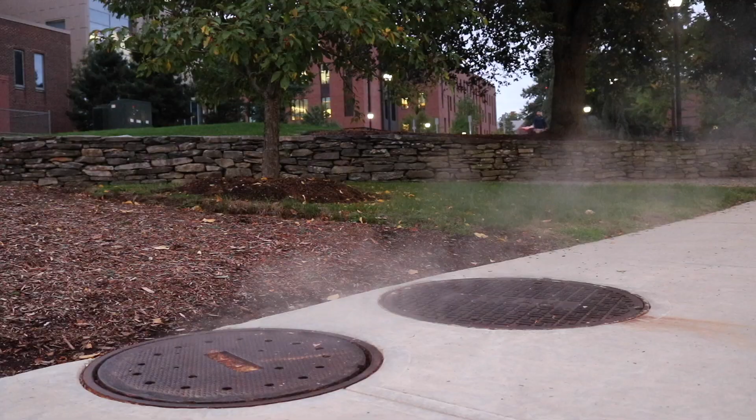But on the topic of water, not many students think about where the water flowing out of their taps, fountains, and toilets around campus comes from. Or, more importantly, where does the used wastewater go? This is where the water pollution control facilities around campus come in. Join us on our journey as we seek to reverse engineer this complicated large-scale process, from tap to bottom.

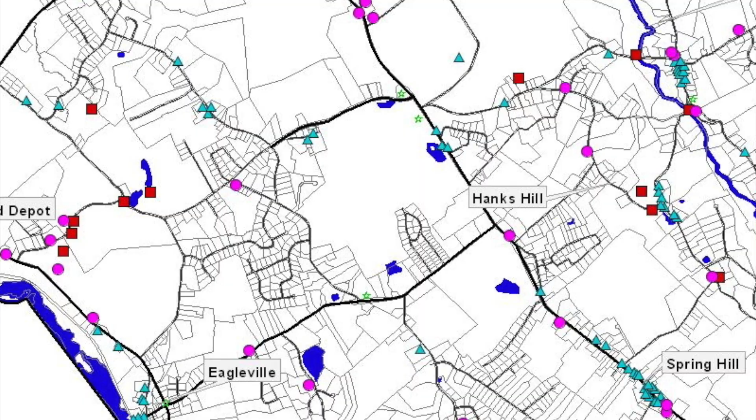The water pollution control facility for UConn is located at 25 LeDoyt Road within the main UConn campus. Rebuilt in 1998, it sits on 10 acres of land. The reclaimed water facility is located right beside it, a position that allows treated wastewater to flow into the facility to be further processed for use in the cogen power plant. These two facilities service both the main and depot campuses of UConn, as well as UConn's neighbors in the surrounding town of Mansfield. The wastewater facility processes an average 1.5 million gallons of wastewater daily.

The WPCF operates under a National Pollutant Discharge Elimination System permit, issued by the Connecticut Department of Environmental Protection. Part of the water treated at the facility is released into the Willimantic River next to the Eagleville Dam. The rest goes to the reclaimed water facility.

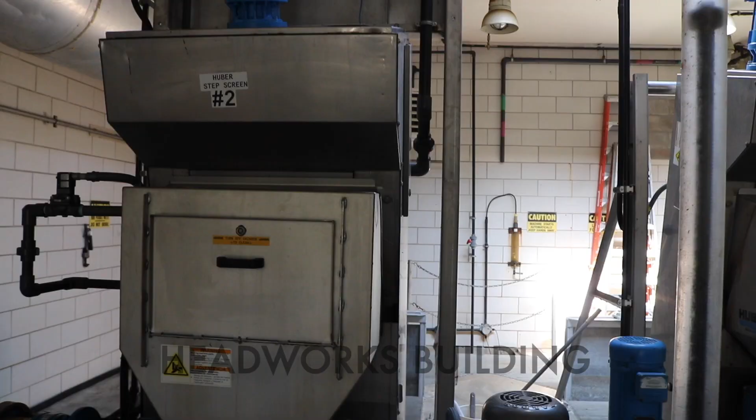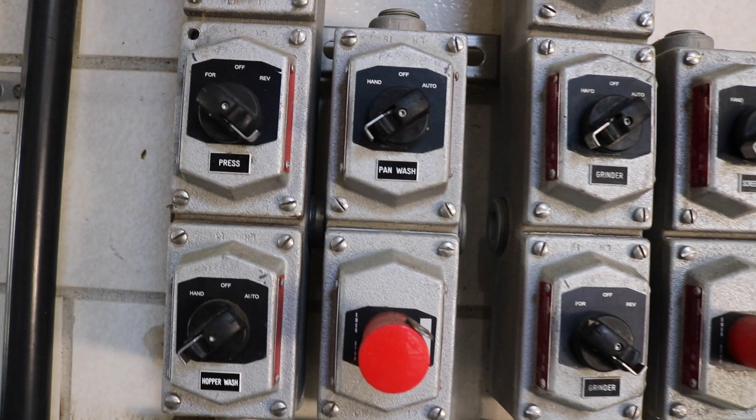The first stop for the collected wastewater is the headworks, located in this building here. The wastewater first runs through a step screen. This traps any inorganic waste that was carried along with the water, such as hair and sanitary napkins. The step screen brings the waste out of the water, where it is ground up in a grinder located just behind the step screen. Afterwards, the ground up material is washed to get rid of any organic matter that was trapped with it.

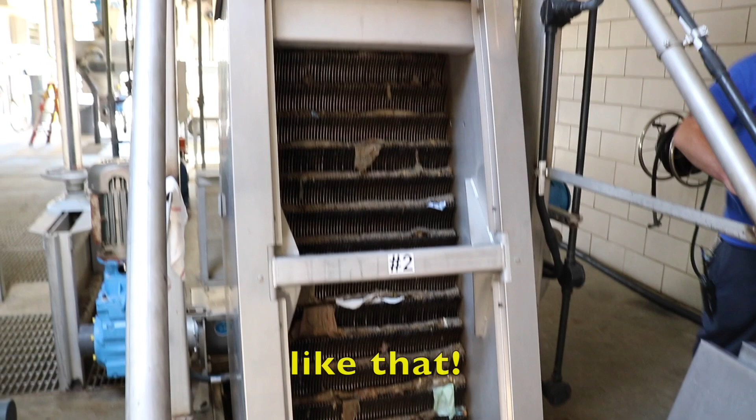It's like all the crap that comes out. What it does is, when it senses the water level getting high on the side, it'll start to run. Like that.

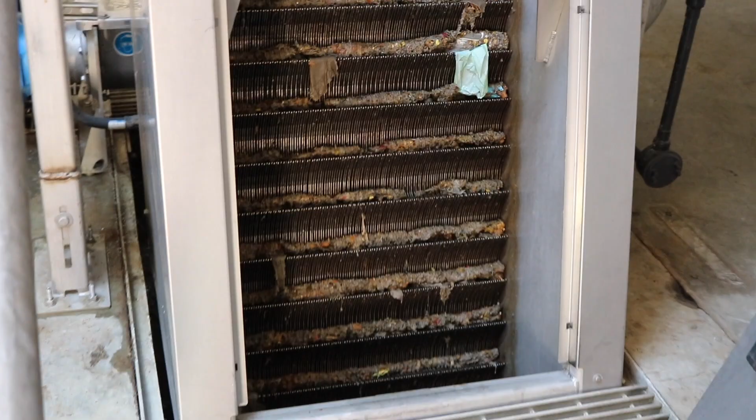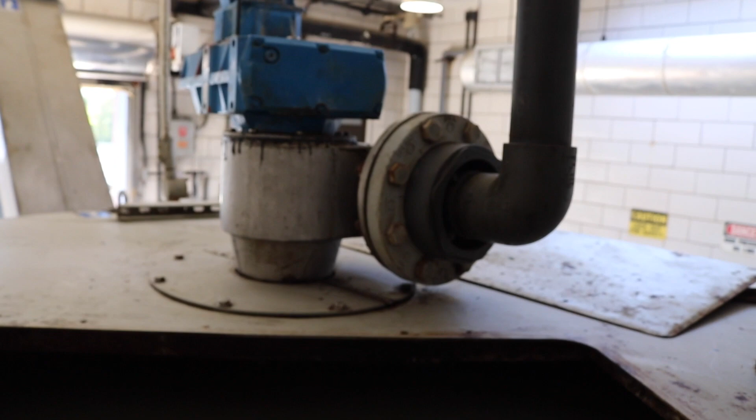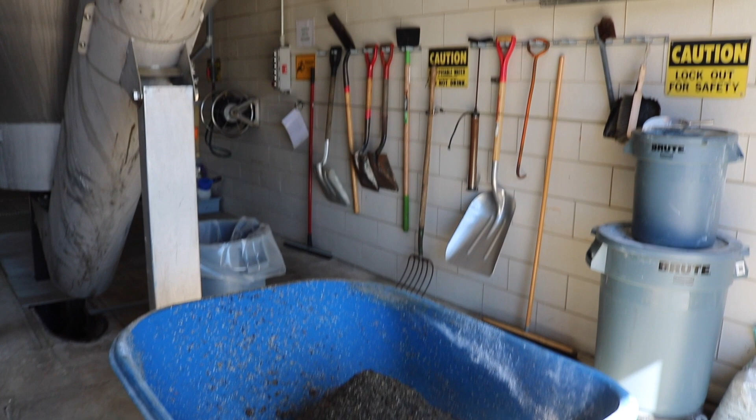After passing through the step screen, the water is slowed to a flow of 1 foot per second. This low rate of flow encourages any additional finer bits of inorganic material, such as gravel or sand, to settle to the bottom. The bottom of this tank is sloped, funneling the material down into a tube where it is pumped upwards to the grit classifier. The grit classifier compresses the material. After enough waste has been accumulated, it falls into a wheelbarrow. The end point of this waste is landfill after it has been tested to ensure that no heavy metals and toxic chemicals are present in the mix.

This step is meant to filter out any abrasive material that may damage the pipes and tank walls ferrying and processing the wastewater. While it does an effective job, there is also a large quantity of organic waste that is collected along with the inorganic waste. Scott, the lab technician of the facility, once ran a test to determine how much of the solid waste was organic. The test involved heating a sample of the waste to 500 degrees Fahrenheit, vaporizing the organic material. When weighed, only 15% of the matter remained, meaning that 85% of the waste disposed of at this stage was organic material.

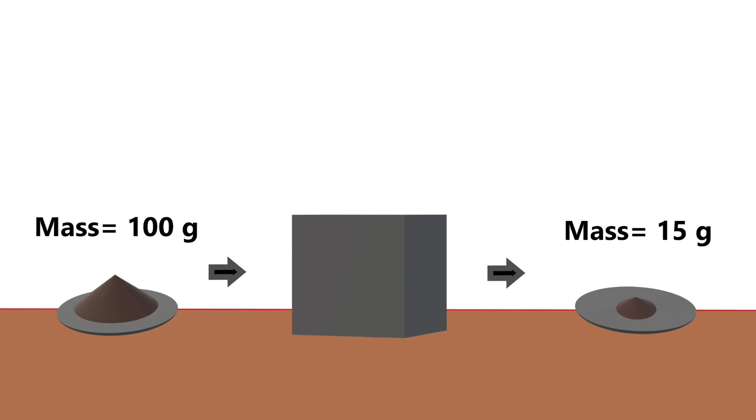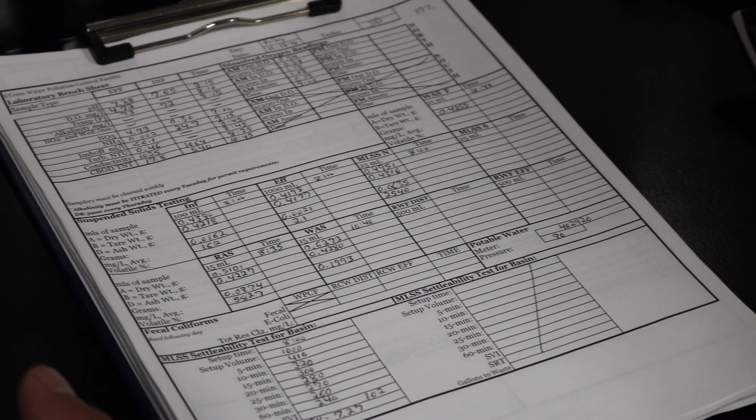So I'm just gonna take my grams, subtract grams of the tare weight. So we have 0.1993. Divide that by 15 mils of sample. Multiply by a million. So our loss is 13,287 milligrams per liter.

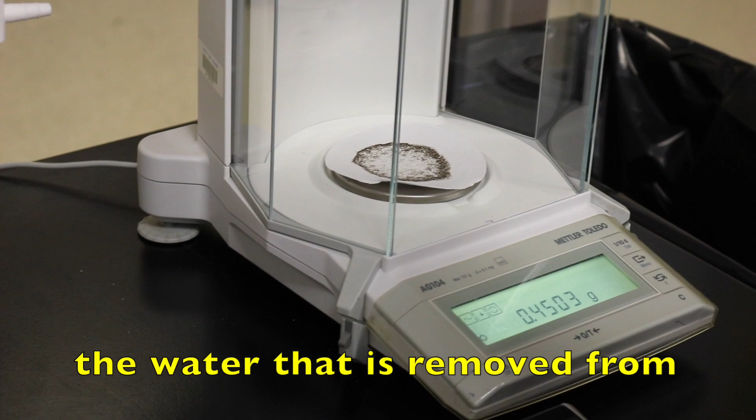I'm supposed to pull this up earlier. And what's that one? This is a filtrate. Okay. This is from the dewatering machine upstairs, the Huber. The water that is removed from the sludge is called filtrate, and we test to see how much loss there is, so we can calculate how much we need to waste. Because if we say we need to waste 24,000 gallons, and we're having 2,000 milligrams per liter of filtrate loss, you can calculate how much more you need to waste to compensate for that loss. Because you're not actually removing as much biomass from the system as you think you were.

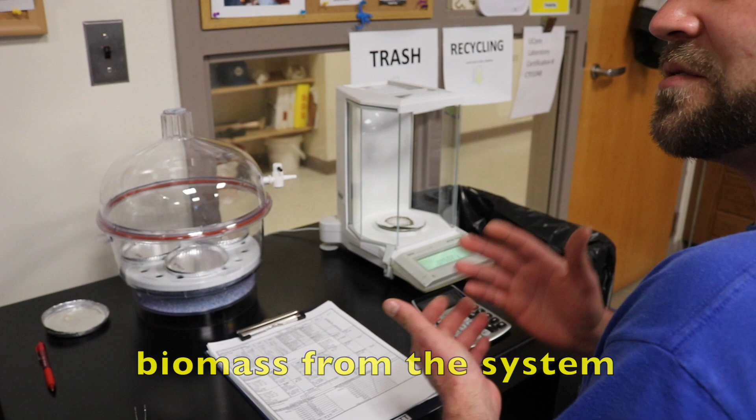Yeah, and how much of a sample was that from? Was that from like 25 milliliters? That's 10 milliliters. 10 milliliters. We've been having poor numbers recently. Poor? Poor. Oh.

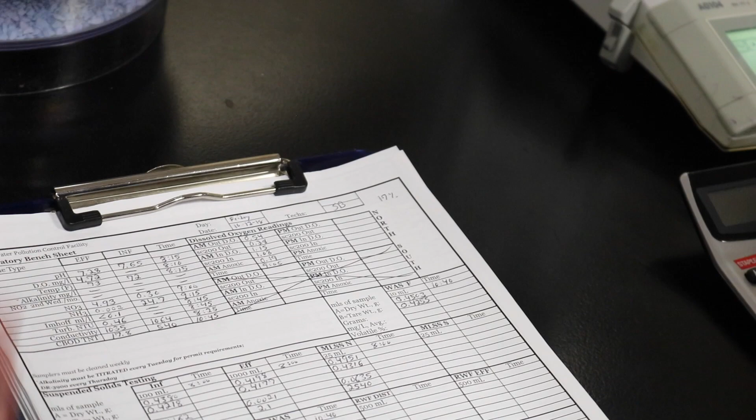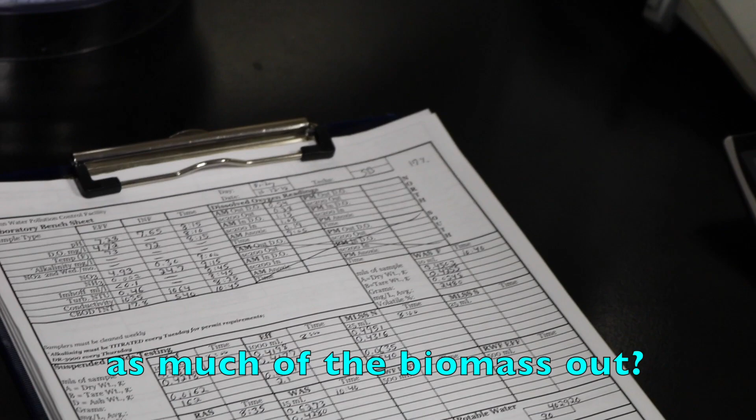Five. 0, 2, 4, 8. 10 mils. That means it's 2,480 milligrams per liter loss, which is kind of a lot. So it's not pulling as much of the biomass out? Yeah, it's escaping. It's escaping back.

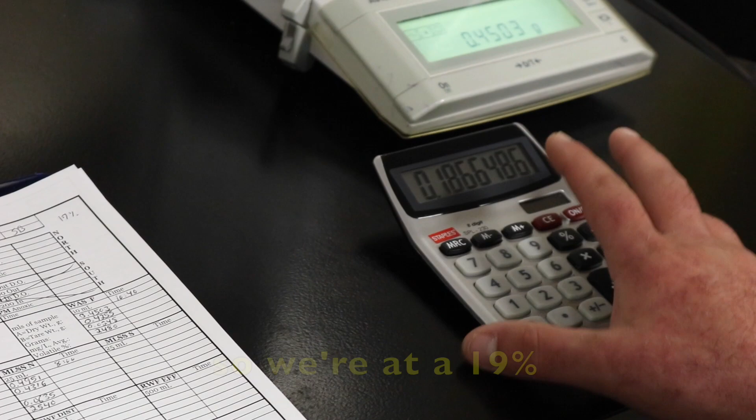An interesting thing to note here is that wastewater treatment plants normally have a primary clarifier after passing through the headworks. The primary clarifier serves to remove some of the organic waste from the wastewater to process it more efficiently. However, the wastewater that arrives at this particular facility has a lower proportion of solid organic waste per gallon than what most facilities receive, and thus doesn't need this step.

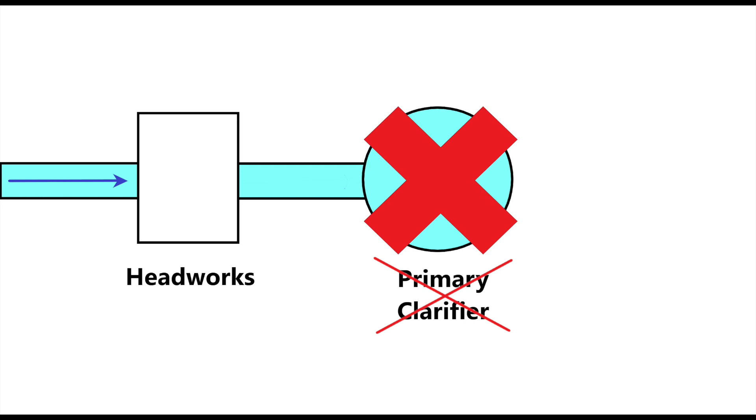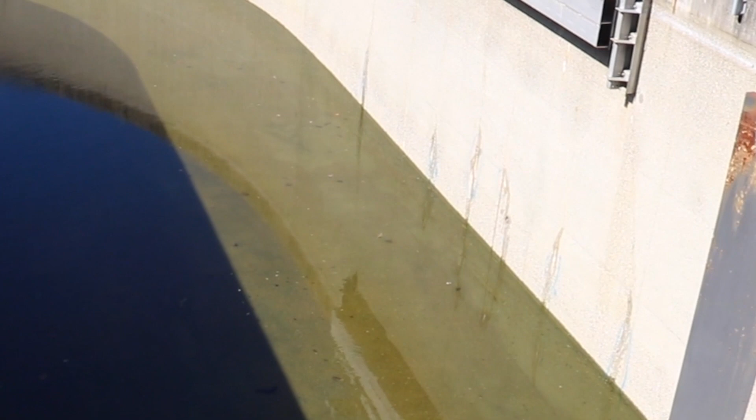While it just looks like a very polluted river on the surface, inside there are microbes hard at work. The microorganisms consist of mostly bacteria, specifically ammonia and nitrite oxidizing bacteria, glycogen accumulating organisms, and ordinary heterotrophic bacteria. Each bacteria carries out an important function, from removing nitrogen dissolved in the water to helping break down the organic waste. The nitrogen primarily comes in the form of ammonia.

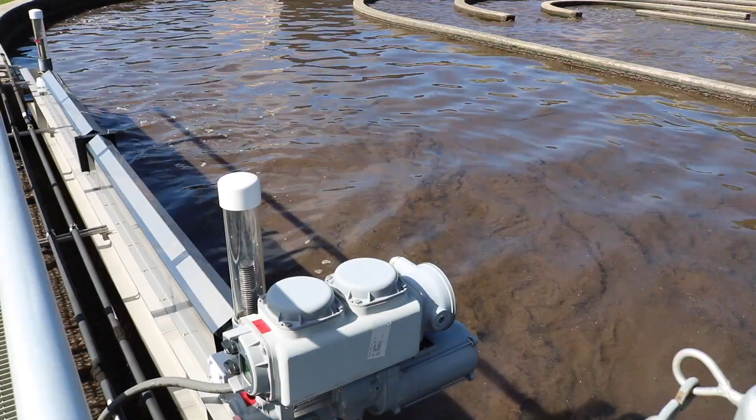Most of the ammonia has ionized into ammonium due to the alkalinity of the water. The bacteria get to work converting the ammonium and ammonia into nitrite and nitrate. During this process, the bacteria also produce carbon dioxide, water, and more of themselves through binary fission. This occurs in what is called the aerated zone of the tank. In these tanks, two aerators introduce oxygen gas into the water by churning the water vigorously.

They operate without stopping as the biochemical oxygen demand of the bacteria dictates that they need oxygen to decompose the ammonia. Without oxygen, the microbes will undergo endogenous respiration, oxidizing their own cellular mass and consuming themselves. The sludge becomes harder to treat, not settling to the bottom of the clarification tanks because of the gas generated by the process. Biochemical oxygen demand is measured daily to ensure that enough oxygen is being added to the water to keep the process going.

In the anoxic zone, microbial flocks turn the nitrate into nitrogen gas, using the oxygen atoms in the nitrate to fuel the process. These microbes are autotrophic, pulling carbon from non-organic sources such as the carbon dioxide generated in the process prior. The CT Water Pollution Abatement Association recommends that the dissolved oxygen in the anoxic zone be lower than 1.0 milligrams per liter, but never reach 0.0 milligrams per liter.

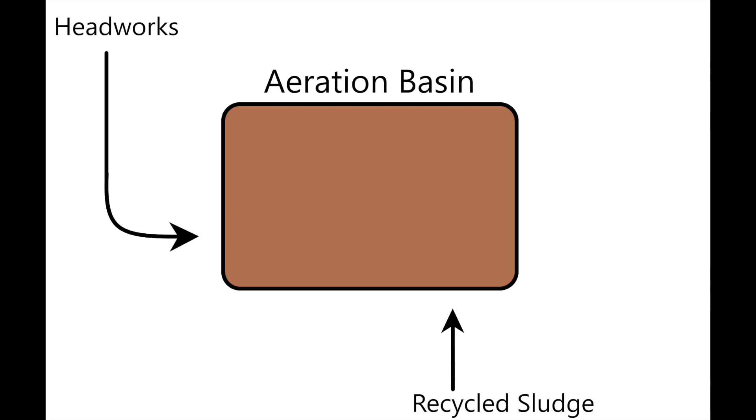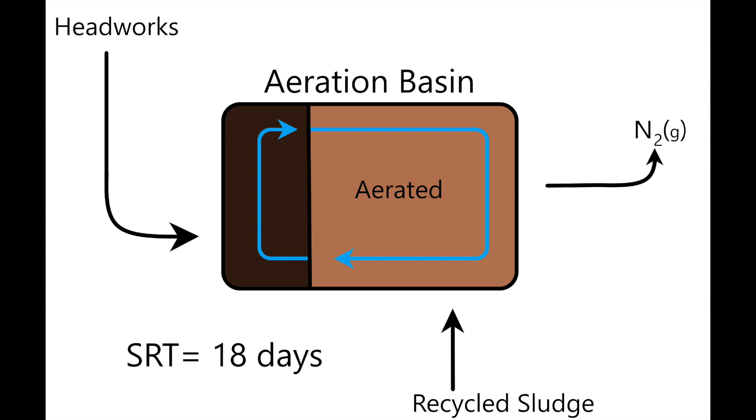Sludge is both introduced newly into the system and recycled back in. Multiple passes through the anoxic and aerated zones allow for the nitrogen to be almost fully processed out. An added benefit is that the long cycles allow for the bacteria to reproduce. This plant recycles its sludge for quite a while, adding up the total sludge retention time of 18 days. The end result is water that is almost up to drinking water standards, with a total suspended solid count well below EPA and state standards of 100 nephelometric turbidity units.

UCONN's bacteria to organic solids ratio is on the low side, aiming for an optimal ratio of 0.07 grams per gallon. While there is enough liquid coming in to run both aeration basins, there isn't enough food to sustain the bacteria comfortably. Thus, the facility only runs one basin and keeps a close eye whenever there is a surge of influent coming in during breakfast, lunch, and dinner.

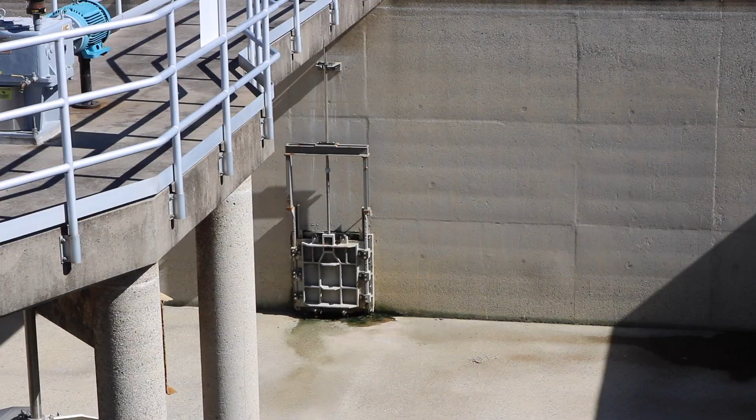A few years back, this used to be the opposite case. UCONN's dining halls used to grind up their food waste and flush it into the sewage system. This practice introduced more solid organic waste into the water, which forced the facility to run both tanks, leading to higher operating costs and a much higher energy bill. During the winter and spring breaks, not a lot of waste is generated. A carbon supplement called Micro C is added to keep the microbes fed.

This product, manufactured by Environmental Operating Solutions Inc., is a mix of carbon-based organic compounds. The company's website states, Micro C premium carbon sources are proprietary, eco-friendly products used by water and wastewater treatment facilities to help them achieve their contaminant removal goals. Our Micro C products are liquid chemicals generally used on a recurring basis to provide an energy source to bacteria

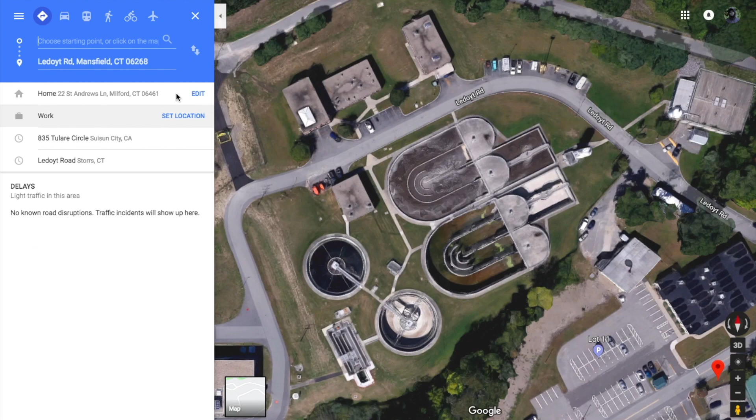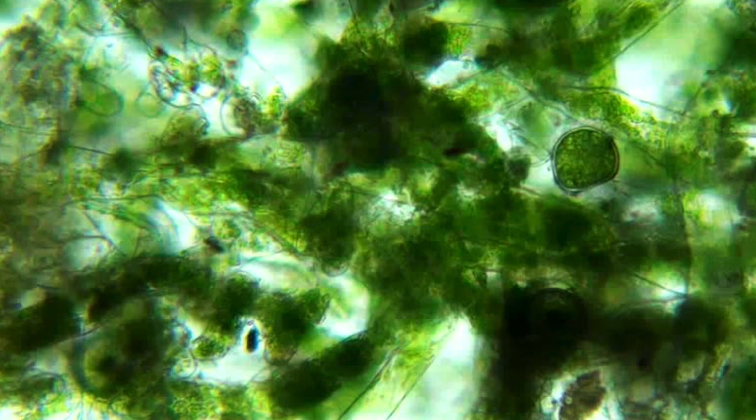in biological treatment systems. The denitrification process is crucial because this water will eventually be discharged into the nearby Willimantic River, and part of it will be going to the reclaimed water facility. If excess nitrogen enters the river, it could encourage the rapid growth of algae and other aquatic plants, clogging up the waterway and disrupting the local ecosystem.

When those plants inevitably die, their bodies are decomposed by bacteria, which use up the oxygen in the water and kill other plants and animals within the body of water. This would have a devastating impact on the surrounding environment and could also be potentially harmful to humans, should they go near the affected area. If the effluent was going to be discharged into the ocean, this process wouldn't be necessary. The large volume of water in oceans would dilute the nitrogen in the effluent to negligible levels.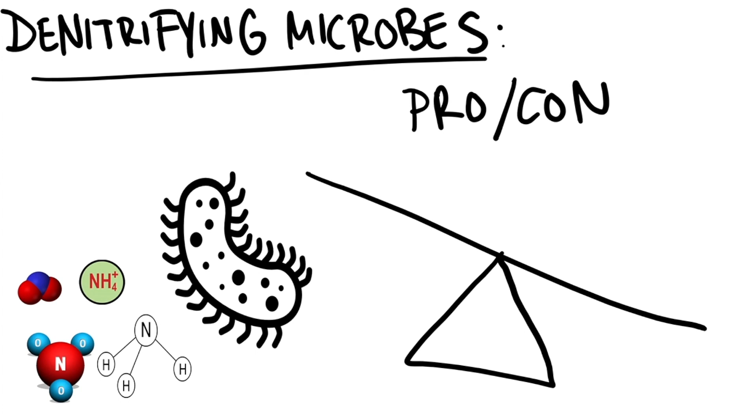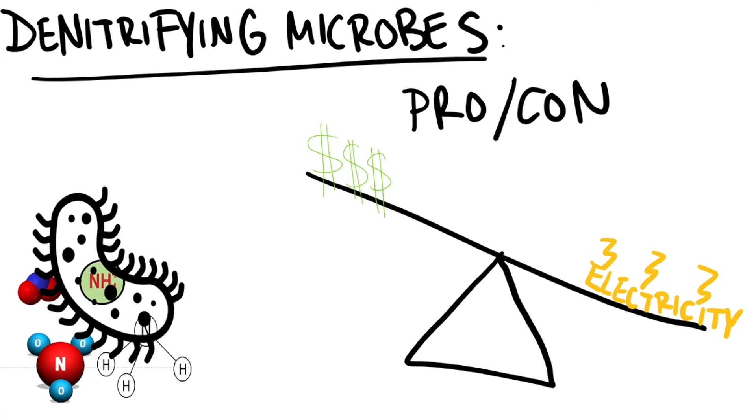The facility runs this type of system because it is much less expensive than other types of systems used to denitrify and filter the water. However, the aerobic system requires a large amount of electricity to run the motors and composes most of the facility's energy costs. This system isn't well equipped to handle the high surges of influent during the mealtime hours. When there is a large volume of water, the influent and the waste it carries has to run through the tanks faster, making it difficult to denitrify the water.

Sometimes there is a larger volume of ammonia in the water than normal. To counteract this, the gates that allow the sludge to pass through the anoxic zone are shut, giving more time for the autotrophic microbes to process the ammonia. This leads to more nitrogen passing through as nitrate, but it's a trade-off they have to concede in order to keep the systems online and functioning.

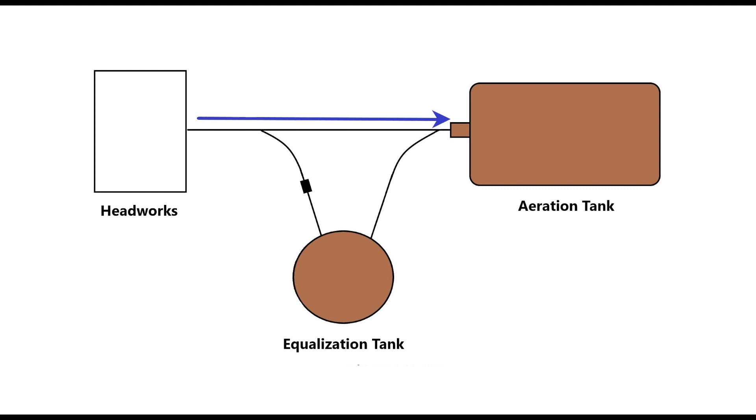A solution to this problem would be to install an equalization tank to hold the wastewater during the surges. Once the volume in the aerated tank hits 1.6 million gallons, the water is directed to the equalization tanks. There, the water would be aerated and held until the low flow times between 2 a.m. and 6 a.m., where it would be released into the main processing tank to counteract the low flow rates coming in.

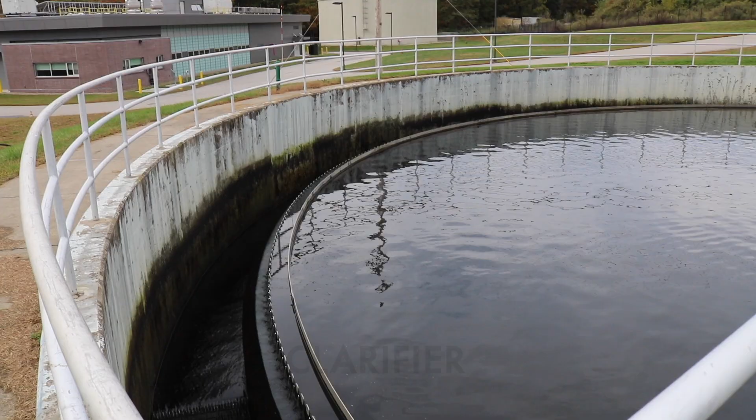After going through a splitter box, the sludge flows into the clarifiers. Here, the solids are not encouraged to mix with the water, as the primary role of the clarifiers is to encourage the settling of sludge and other things incorporated into the water. The circular clarifiers take advantage of the different densities and physical properties of the various solids and liquids that were mixed together in the previous stage.

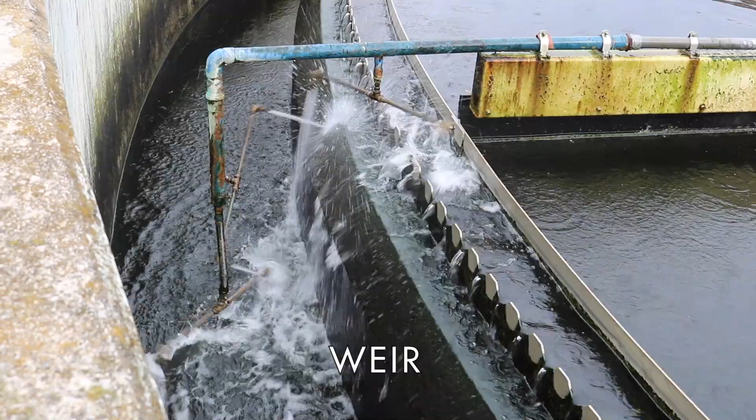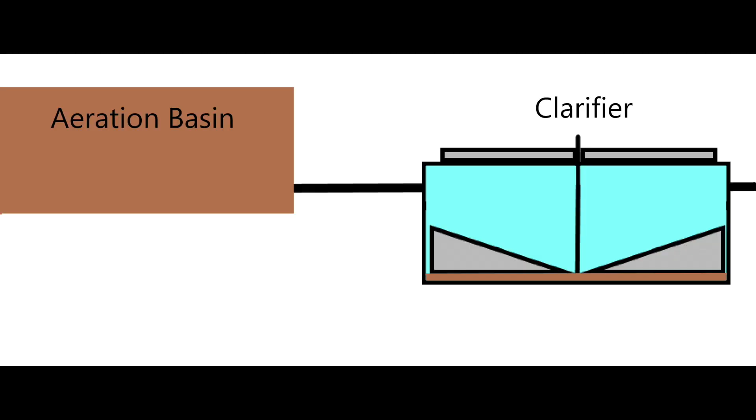The denser sludge containing organic matter and microbes sinks to the bottom, where it is pumped back into the aeration tanks or wasted out. The oil and lighter scum floats to the top, where the skimmers slowly push it out of the water. It then goes to the scum pump and recycled back into the system. Only about 25% of the sludge collected at the clarifiers gets put back into the basins. The rest goes into the compressors and wasted out.

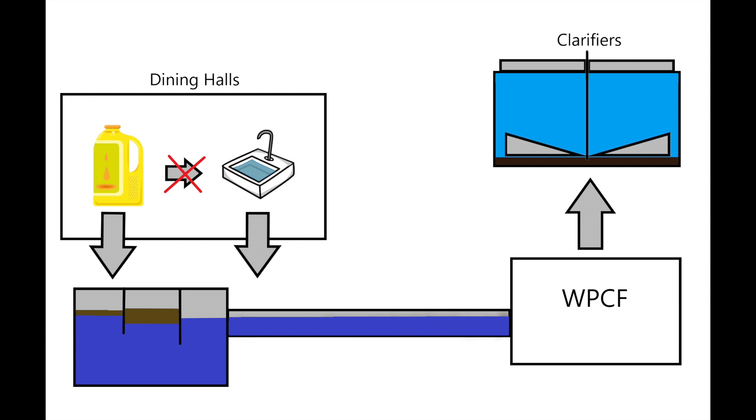Grease used to be a major issue until the dining hall kitchens implemented a program to store grease in grease tanks and not rinse down the drain. On top of the clarifiers, there might be pin floc, old sludge that refuses to settle, a result of endogenous respiration. There's really no way to handle it other than limiting the process in the aeration chamber. To balance the amount of waste activated sludge and return activated sludge, some of it is pulled out of the system, or wasted out.

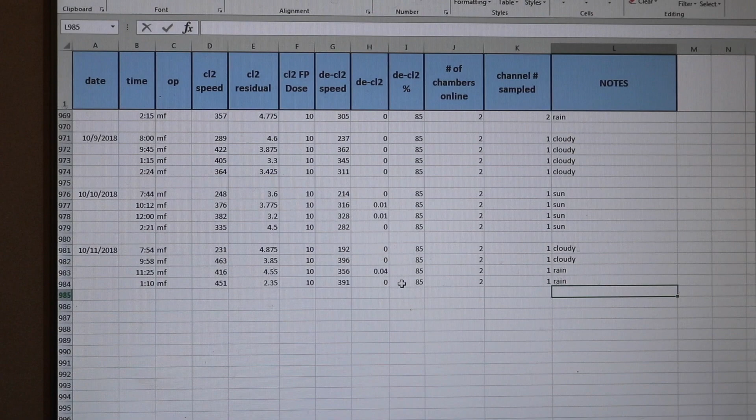The amount wasted out is determined by maintaining a certain mean cell residence time, how long a single cell stays inside of the system, usually measured in days, and comparable to the sludge retention time. The amount of return activated sludge is determined by using the current plant mixed liquor suspended solids, the solid count in the wastewater, and sludge volume index, the rate that sludge is settling in the aeration chamber, and calculating how much to take out on a spot.

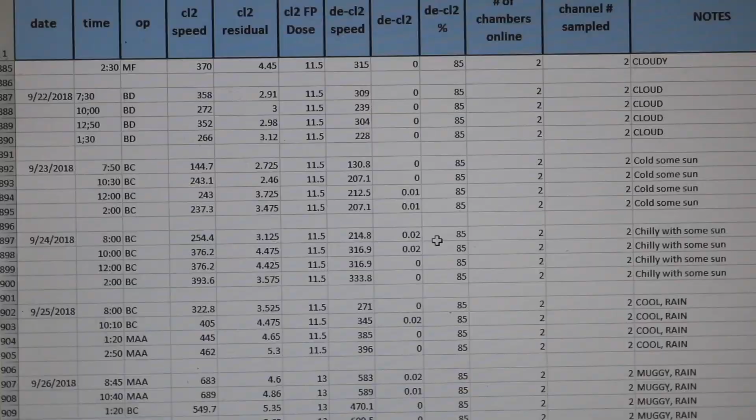To compress the WAS and RAS to a manageable solid, 2 hydraulic screw presses slowly compact the material. The water squeezed out during the process is returned to the aeration basin. The compacted material is called cake, and when enough is accumulated, it falls into a dumpster. This waste is certified clean and transported to the place in Hartford where it is burned for energy.

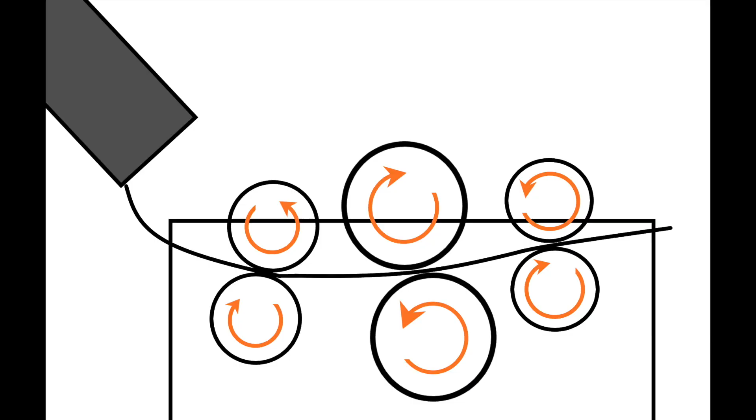The facility previously used a series of rollers to compress the material, but that system couldn't keep up with the volume of waste-activated sludge. It sits next to the hydraulic presses, the frame awaiting final dismantlement. The original plan for this section had the presses dump their load within a fully automated system, wherein sensors would detect if there was enough accumulated waste and dump it onto a conveyor belt, heading straight to a dumpster. However, budgetary restrictions unfortunately forced them to scrap this plan.

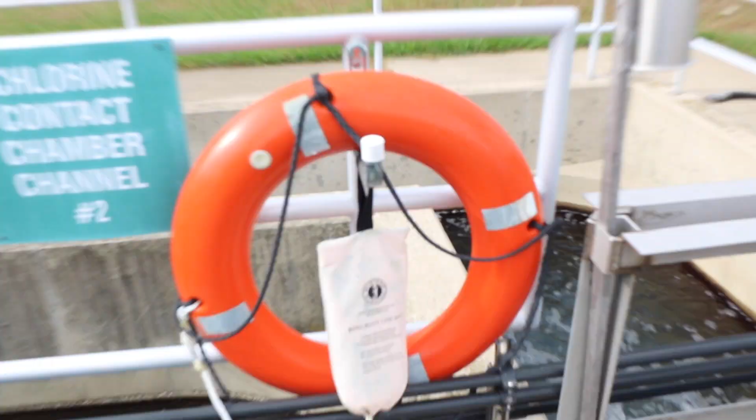After leaving the clarifiers, the wastewater is considered ready to be decontaminated. This is done through chlorination and dechlorination. Sodium hypochlorite is fed into the system using pumps, closely monitored to be as close to 0.3 milliliters per gallon. As the sodium hypochlorite hits the water, it ionizes into sodium and hypochlorite ions. The hypochlorite ion attaches to any microbes and bacteria and oxidizes them, ripping their cell walls apart, killing them. This step is important because human waste contains bacteria such as E. coli, and the treated water is going directly into the Willimantic River.

With both the chlorine contact chambers online, the water remains in the chambers for a total of 41 minutes with a flow of 3 million gallons a day. At peak flow of 7.2 million gallons a day, the detention time drops to 17 minutes. The snaking layout of the chambers allows the water to move slowly through a smaller amount of space.

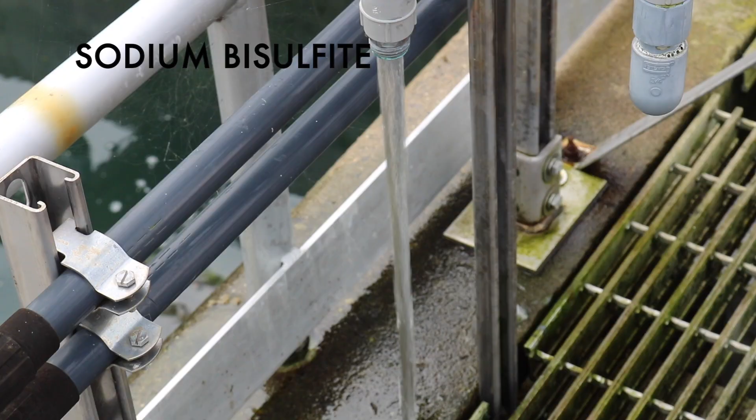Sodium bisulfite is used to neutralize the residual chlorine after the designated chlorine contact time has been fulfilled. This is an important step because chlorine is considered dangerous to the freshwater environment if the level of chlorine exceeds 0.5 milligrams per liter. Chlorine can also bind with certain carbon compounds to create a carcinogen. After this, the effluent is now considered safe to discharge into the Willimantic River.

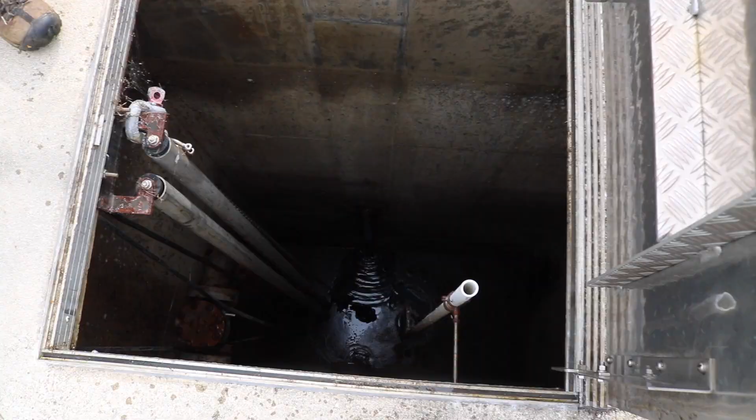As this is the last step in this facility, the majority of the effluent quality testing uses water drawn from here. Here they test for E. coli, ammonia, nitrate and nitrite, alkalinity, orthophosphate, phosphorus, and conductivity or salinity. If they violate any of the regulated standards, they're required to note it in the reports they send to the Federal Environmental Protection Agency and the State Department of Environmental Protection. In addition, some of the effluent is drawn off and reused in other parts of the facility. The water used to wash down the clarifiers, the pumps, and the grinders is all recycled effluent.

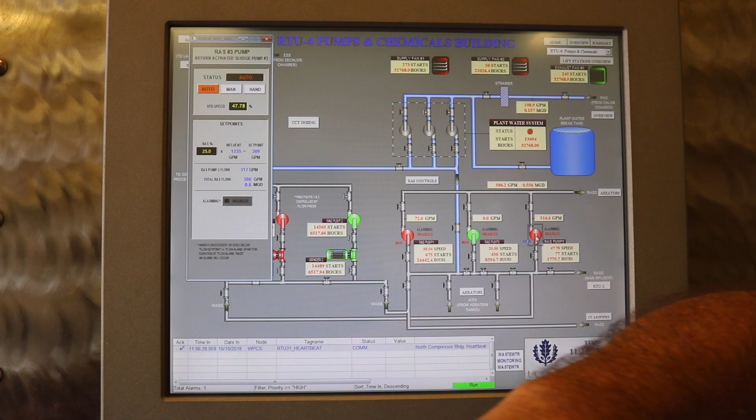The supervisory control and data acquisition, better known as SCADA, is how the people working at the plant keep track of water flows and other measurements. It updates the information as it comes in, extending to all the lift stations in and around UConn campus. Some of the things they keep track of are the level of nitrogen in the form of nitrate in the aeration tanks, the levels of sodium hypochlorite and sodium hydroxide in the large chemical storage tanks, the amount of water in the lift stations, and the state of pumps and any alerts that are resolved and unresolved within the last weeks. Each section of the facility has its own dedicated subsection, with the main office containing all the information each subsection collects.

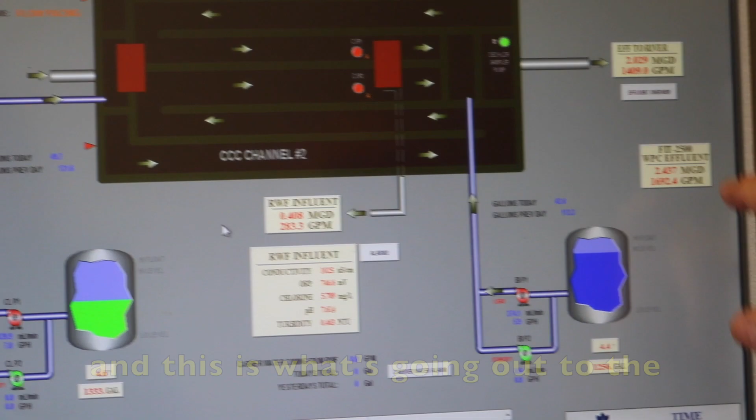SCADA. And what you want to do is, right now you're looking at the chlorine pump, the one that's on. So it's going 434.1 milliliters per minute. Your bisulfite is going 360 or 374, it just went up. And this is what's going out to the river right now, 2.0 million gallons per day. This is how many gallons per minute is going out, 1,412.

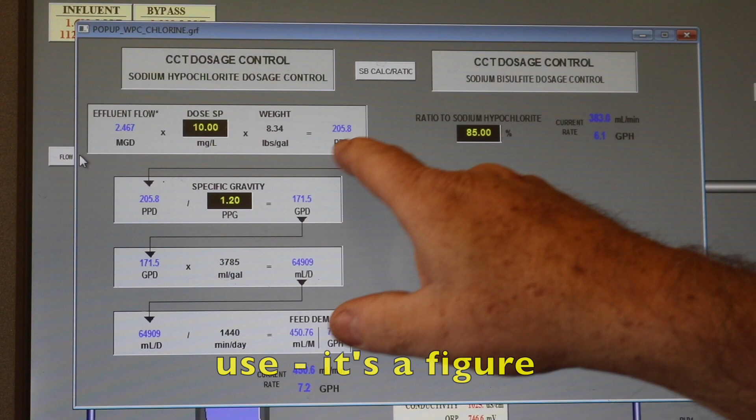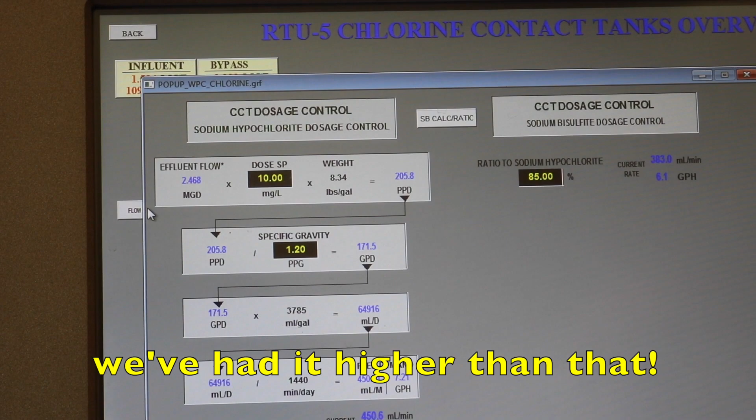If we go back to flow basin, see, this is based on 8.34 pounds per gallon of water, right here, okay? This is pounds per day they want to use. It's a figure. Million gallons per day coming in, milligrams per liter is a dose. So for the chlorine dose right now it's at 10, okay? We've had it higher than that. And this is all Todd's writing. He figured this all out.

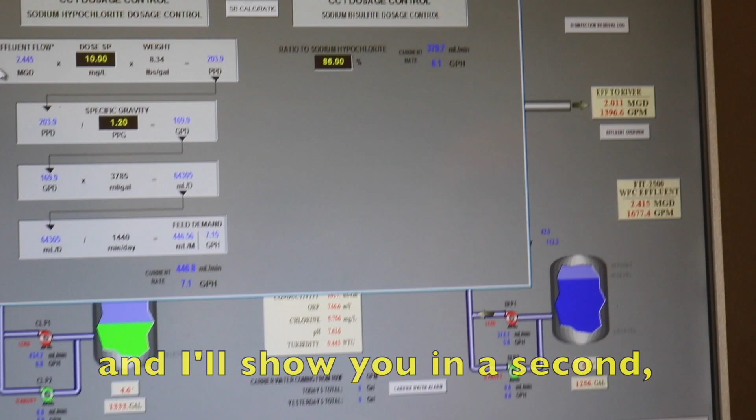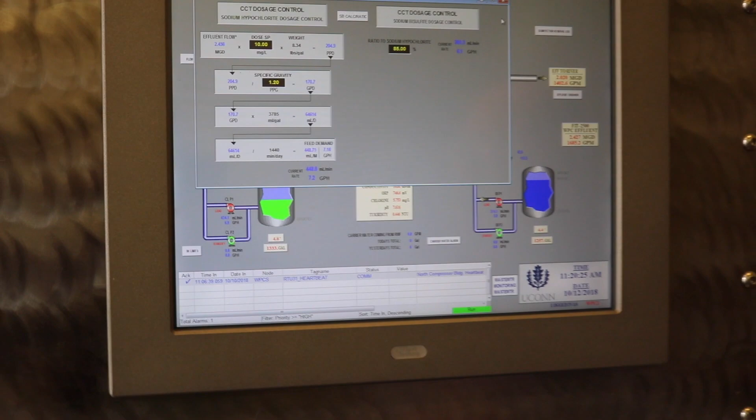1,440 minutes per day, the equivalent to how many you want to put per hour. So you want to run 7 point, it fluctuates. He's trying to keep it around 7.2 gallons per hour, okay? The bisulfite, which is over that side, they're trying to figure out that. But see, that's good and bad. And like I said earlier, and I'll show you in a second, that could change, and that will change certain times. Say if you have too much chlorine and you don't have it all being taken out, you go on this chart right here.

What you're looking for is, it's not so much the chlorine, okay? You're looking at the dechlor, and that's the bottom line. That's what's going out to the river. That's the bisulfite, which, as you were saying, takes the chlorine out, okay?

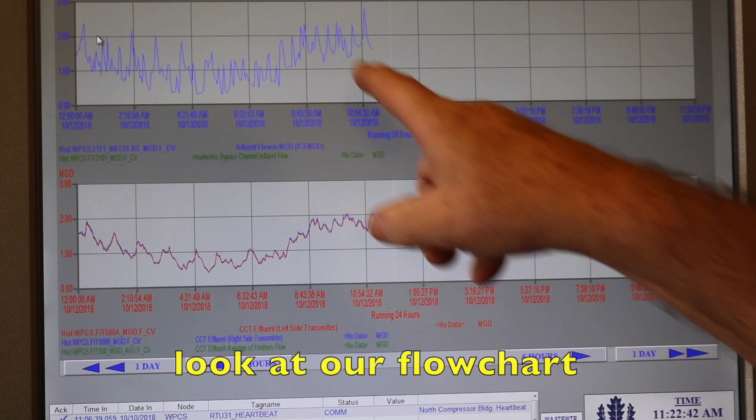Our flow chart, look at the flow chart, the flow coming into the plant. This is what's leaving the plant. That's what's leaving down there. That's high. That's really, really high. So you're like hitting 2 million gallons. Almost 3. 3's at the top. Oh wow. 3's at the top.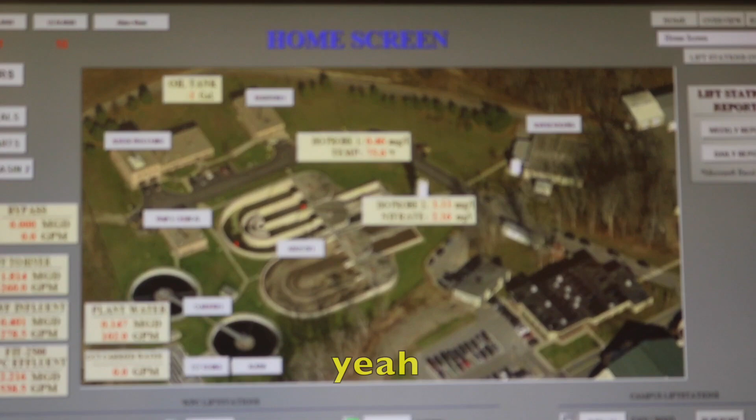If you go back here... Well, lunch is coming up, so yeah, people are. It's true. Yeah. So it fluctuates up and down. You can go on flow totals, which yesterday was 1.5 average million gallons per day. One day was 1.993. So it fluctuates too. So the average is like 1.5 million-ish, but it hits like 3.

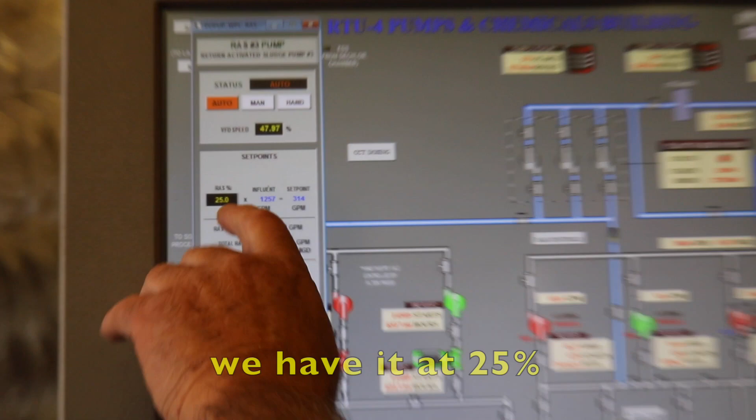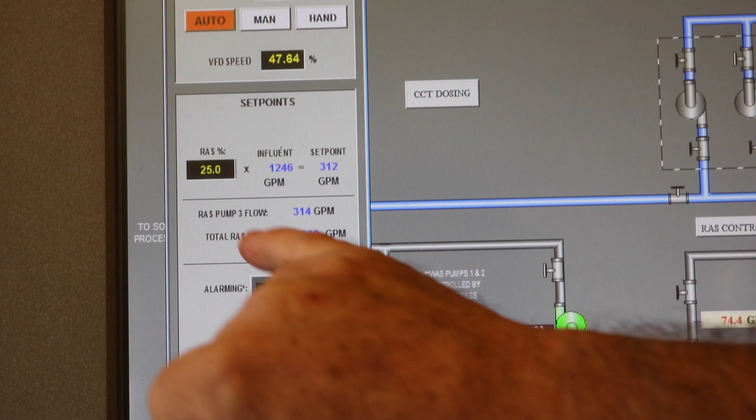So as I was saying earlier, number 3, RAS pump number 3. Yeah. It's clarifier 2, right? So here's the deal. We have it at 25%, okay? The influent coming into the plant is at 1,246 gallons per minute, okay? So you take 25% of that, it's 312. Yeah. So right now it's going in at 314, 316, whatever. But that's going back to the plant. So the rest of that is staying in the clarifier, or it's going over the weir, going down to the contact chamber. So that basically stays there.

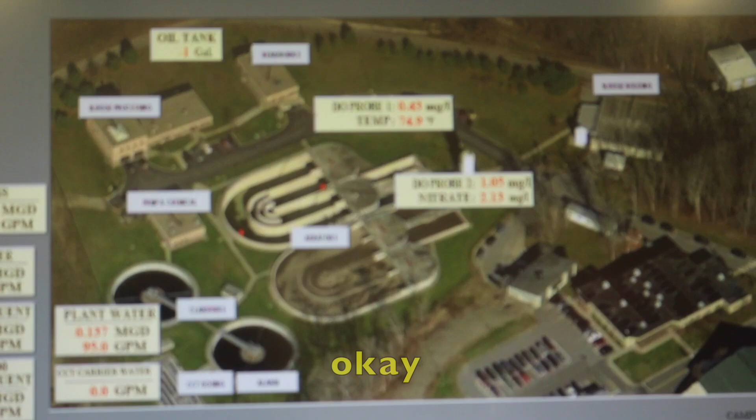I was saying earlier, if we want to go to Gurleyville, okay, these are our lift stations, okay? Pump 3 is on right now. Yesterday, Gurleyville pumped 230,380 gallons to our plant. Today, they've already done 175,000 gallons. That's high. Yeah. I've seen this at 600,000 coming here. And you've got Storrs Center. Oh, Storrs Center. Storrs Center goes all the way through there.

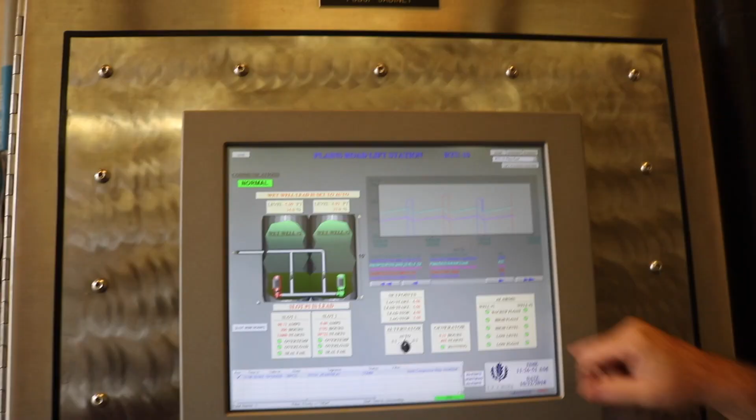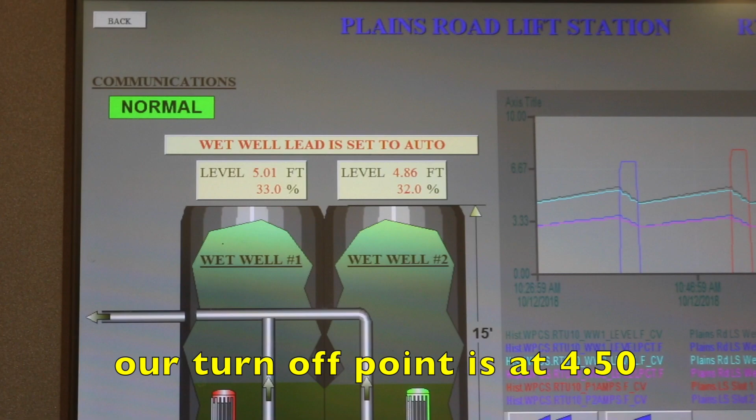The red is on and the green is off. So we could tell right now the level, if you watch this, is going down, 5.03, right? Our shut-off point is at 4.50. You keep an eye on this. When it gets down to 4.50, that would go green. And that's how we determine if we have issues or we don't have issues. So that's pump 1, and we have it here alternating. So pump 1 goes on, next time pump 2 will go on. Yeah. So we balance our pumps that way too.

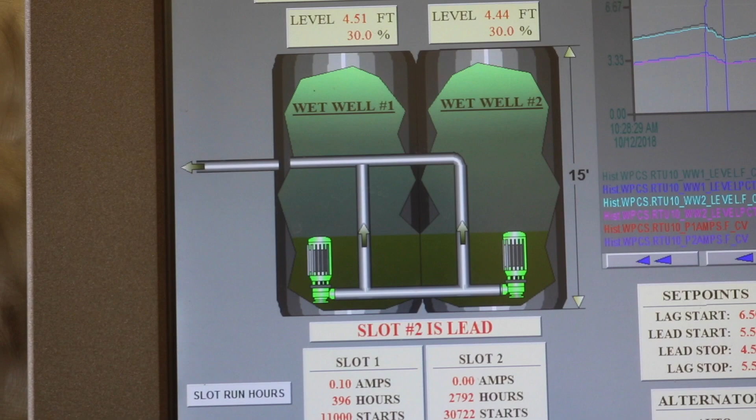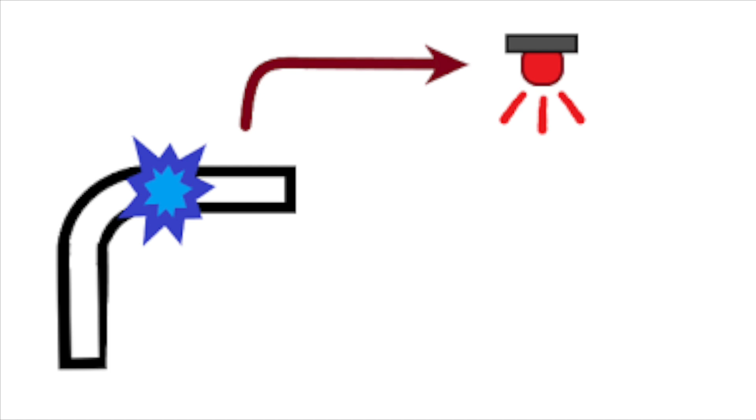Any malfunctions within the pumps and valves and any pertinent, unusual, real-time data sounds an alarm within the system, which is relayed to the workers. This, supplemented with the daily testing within the lab, is how the facility's operators keep the sewage system up and running and how they are able to respond to any problems promptly.

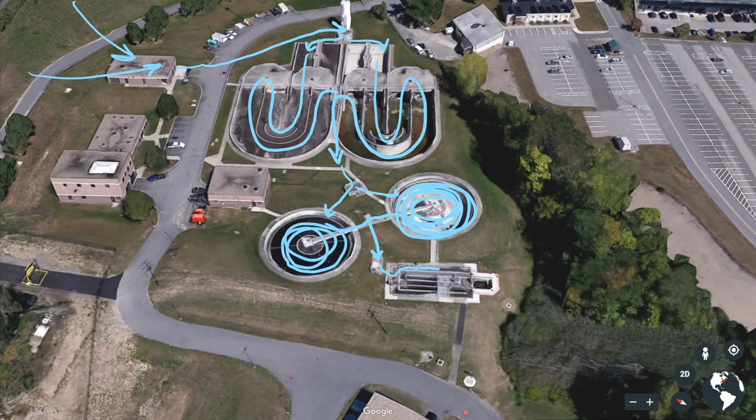UConn's water pollution control facility is uniquely tailored to suit the campus's needs. The lack of a primary clarifier both cut down on the amount of land being used as well as helping to maintain an ideal bacteria to organic mass ratio. The biologically and mechanically based systems utilize natural processes that happen in lakes and streams all around the world: the settling of grit and the decomposition of organic matter to their fullest extent. The facility is much like a dirty river, looping back around and around until all the pollutants and suspended solids have been removed from the water.

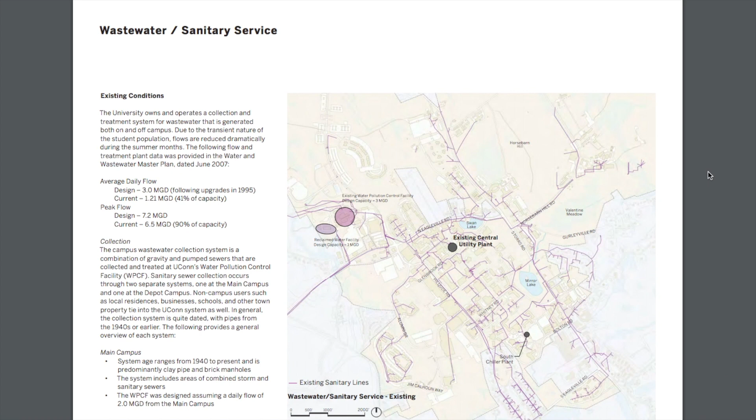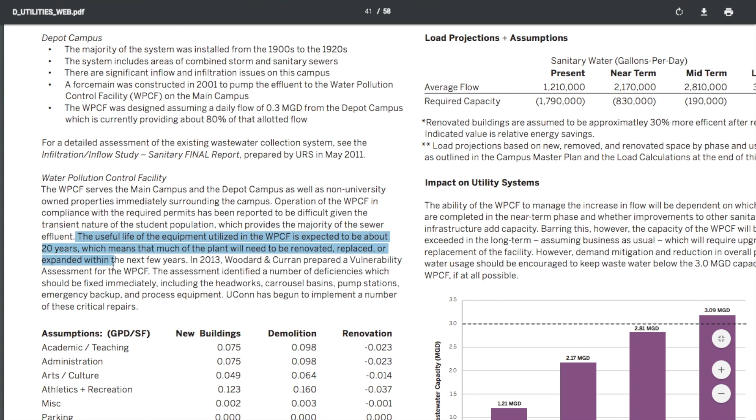A planned upgrade of $15 million to the facility was cut from UConn's budget, limiting the ways in which the facility staff can respond to sudden surges in flow rates. This also calls into question how much longer the facility can sustain the growing population in the university on a system built 20 years ago. And while their systems are all well maintained and replacement parts are readily available to them, that doesn't address the fact that UConn's growth is limited due to the amount of wastewater the facility can safely process.

Wastewater treatment facilities are an important step in keeping our rivers and lakes safe for us and the plants and animals that call them their home. The Clean Water Act highlighted the danger of discharging untreated waste into fresh bodies of water, outlining guidelines and regulations that had to be met to keep the waterways safe and toxin-free. Without this vital facility, it would be difficult to keep the natural ecosystem around UConn healthy.